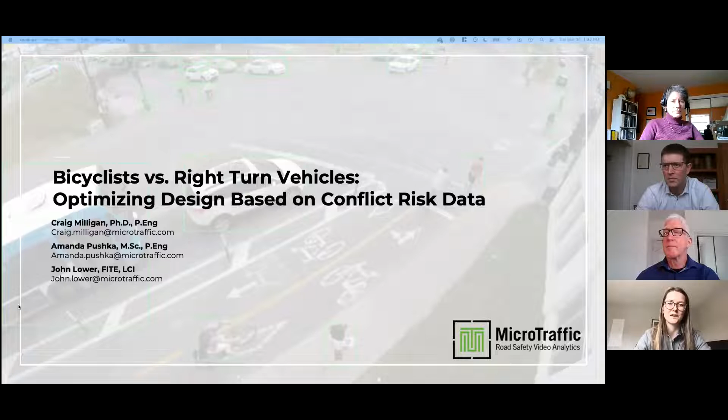So I'm Amanda Pushka. I'm a road safety engineer at MicroTraffic, and I'm joined by my colleagues, Craig Milligan and John Lower, who have road safety backgrounds as well. And Craig's the CEO and co-founder of MicroTraffic. Today, we also have some speakers. I guess if I share the outline for the presentation today, Kristen Nordback from UNC and Dylan Passmore from the City of Vancouver will both be joining us and speaking a bit about their thoughts and background when it comes to this problem. We're also going to talk about some study benefits, research design, and study mechanics, and then Q&A.

So we're just curious about the demographic of who's joining us today. It's great to see some input come in there, and please keep this menti.com tab open because we have a few other questions as we carry forward here. So great, yeah. I'll just give it another minute here. It looks like we have a decent spread, but a good number of cities and a couple states. So great.

So the next question we have is just related. We're talking here today about bicycle safety, but we're curious about some of the biggest safety challenges that you're facing, your agency, in terms of safety. And this should develop a word cloud so you can actually type in any answer you might want, and inputs and responses that receive multiple answers will get bigger on this slide here. So if you want to put any thoughts you might have for the biggest challenge that your agency might face when it comes to safety. So here we go. We're starting to see some inputs come in, automobile speeds being one.

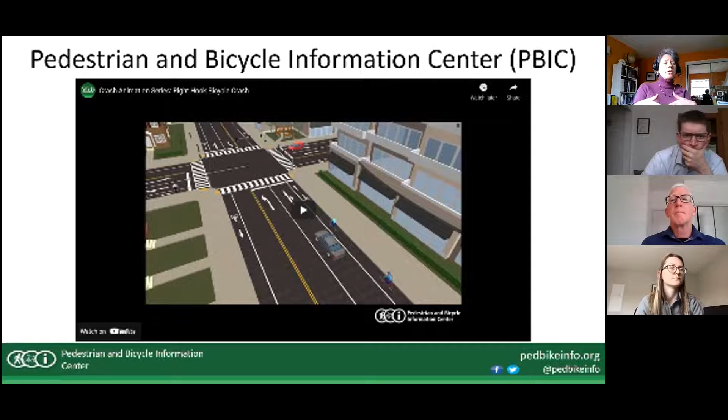And I have a video here from the Pedestrian and Bicycle Information Center, which we host at UNC. It's a place where you can find all sorts of information about bicycle and pedestrian issues of all sorts. And we've just created this series of videos about different crash types that are common for bicyclists and pedestrians.

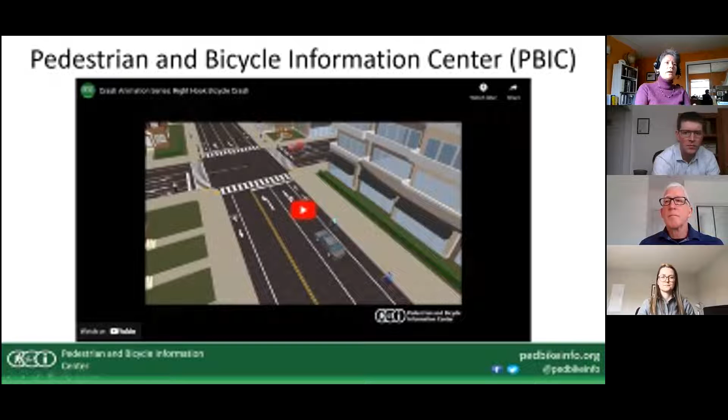So I'm just going to try to play a little clip of this. I know that you all know what right hook crashes are, but if you have colleagues that aren't familiar with this crash type, you can point them here. It's a free resource, and they can see what this crash type is and get a perspective on it. So I'm just going to try to play a little clip here, if I can.

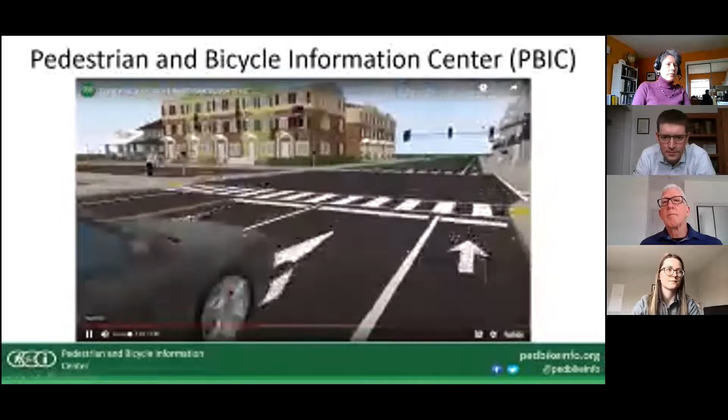So that's our crash type that we're concerned about. And they also have views of a right hook crash, different views from the driver and the bicyclist perspective, so people can really see what this type of crash would feel like. Okay. A driver view of a... So we're gonna now go on to the next slide, but that's available on our website if you want to share it.

So another resource we have is the pedestrian and bicycle crash analysis tool. And that's been used for the last 20 years to crash type different bicycle and pedestrian crashes with motor vehicles. So we know that this right hook crash, which is called the motorist right turn same direction crash in our typology, is the third most common for a college town that used this typing methodology. It's 14% of crashes at intersections.

This college town is about 100,000 people. So even in places that are very bicycle friendly, this is a very common crash type. The good thing is that it tends to be lower severity than some of our crashes. So that's good. But it's still something we're really concerned about because it's so common, and 1 in 9 of these crashes can be fatal and severe in that particular city.

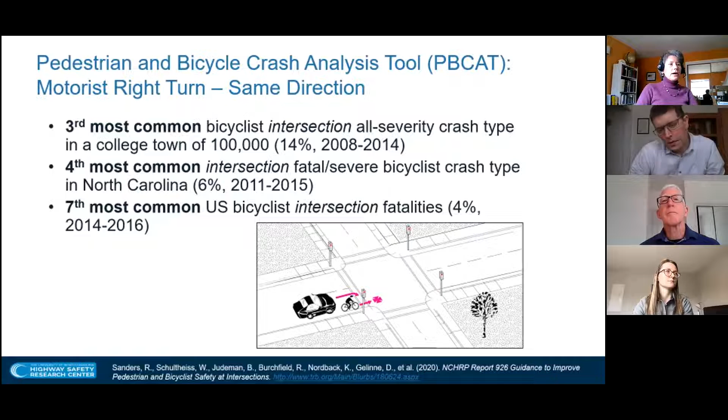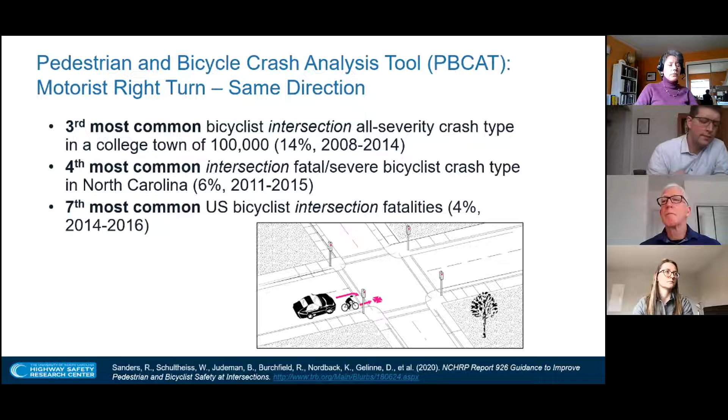The state of North Carolina also used this crash typing, so we can say that it's the 4th most common intersection fatal and severe crash type in North Carolina. So that's pretty big, 6% of the fatal and severe intersection crashes in the state. And when you look at fatalities using the FARS data set across the United States, it's the 7th most common fatal bicyclist intersection crash. So intersection crashes are a little less common than road segment crashes, but still 4% of these crashes, it is a very important crash type for us to study and understand.

So there have been some studies looking at what will remediate this problem. I worked on NCHRP 926 on guidance to improve pedestrian and bicyclist safety at intersections, free, available to the public. And we came up with 14 highly effective remediation techniques for separating the motorists and bicyclists, or for reducing speed at these types of crashes. So I'm not going to read this whole list, but you can see.

And these are not really based on research as much as just common sense and experience and practitioner practice. So we really need to do more research to understand what is the best and most effective. And we have many research methods. Ideally, we would be able to use crash data to understand what is causing and what is the right treatment. But fortunately, we don't have a lot of bicycle crashes, so that's good. But it also means we can't really use that data type to study the before and after and the treated, untreated scenarios for coming up with our crash modification factors for each of these potential treatments.

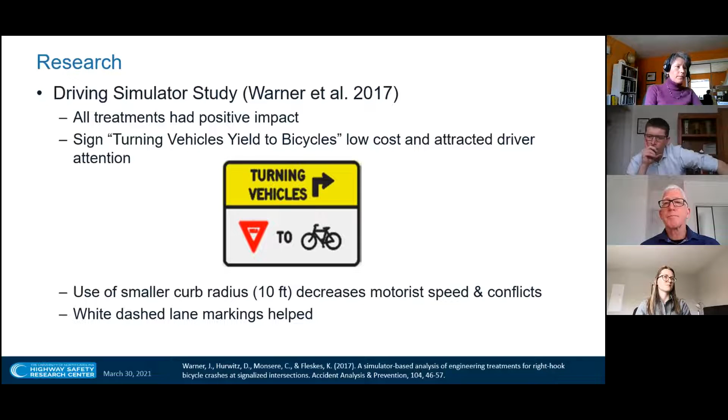So driver simulator studies, there's some of that, and that's been used to look at the eye motion of people driving, and we've found some things. Turning vehicles yield to bikes, reducing the curb radii. This is the work of the folks in Oregon. So there are some, I wouldn't say proven, but at least these are directions that we might go for solving this problem.

Leading bicycle intervals, exclusive phasing when you have high bicycle volumes, and mixing zone treatments can separate. Here's the bicyclist, and the bicyclist would then cross the right turning traffic prior to the intersection. So this mixing zone is a way to deal with these types of crashes, but they cause some confusion.

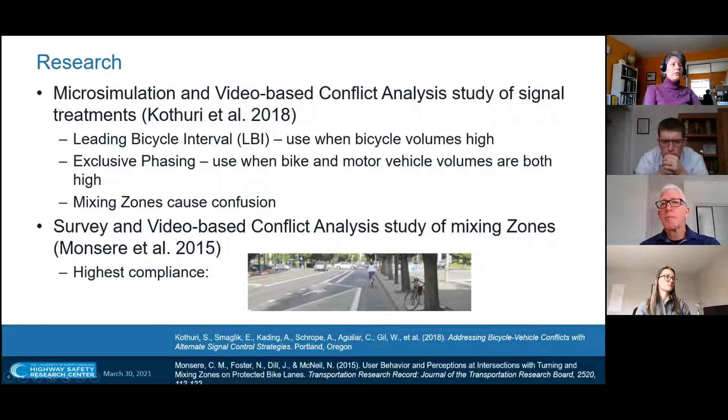This particular one in this study from Portland State University shows that this is a little better in terms of the pavement markings. So there have been some studies, and this one does use the video-based conflict analysis with the huge number of student hours needed to do that study.

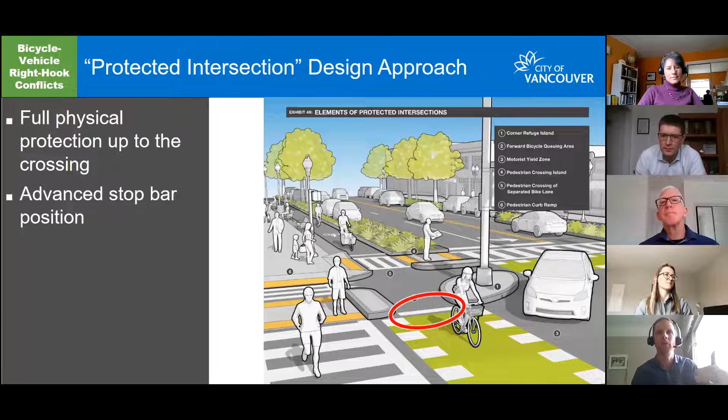We really tried to bring in a lot of the thinking around protecting people biking all the way up to initiating the crossing. So there's having that full protection all the way to where you initiate your crossing, but also that places the cyclist in this advanced stop bar position. It also has the benefit of reducing the pedestrian crossings, which is a bit of a nuance that we're probably not going to get into today.

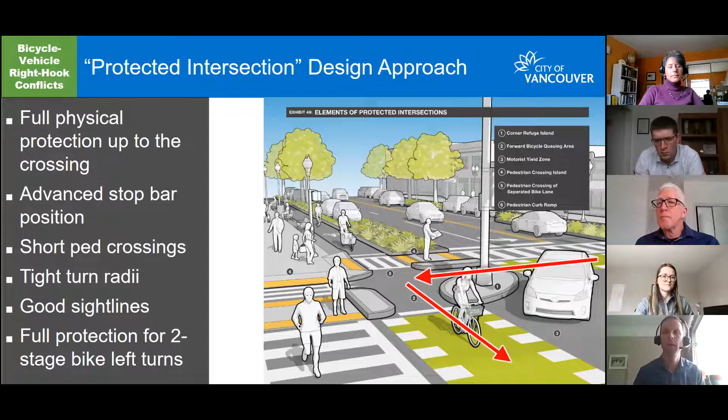But then, related to that right turn, it gives you an opportunity to really tighten up that turn radius in the corner there. There are opportunities to improve sight lines between the motorists and approaching cyclists. And it gives the cyclist making the left turn full protection as they wait to proceed to the second stage of their turn. So there's a lot of benefits to that, and we've been getting really good feedback.

I'd say though, a lot of the questions that we're really struggling with as designers come when you get into some of the nuance, and you don't necessarily have all the space that we see in some of these beautiful artist renderings and conceptual drawings.

So one of the questions we're really wrestling with, especially when we're talking about permissive turns, which this diagram implies, is what turn volumes are acceptable when we have permissive turns allowed? At what point do we really need to push hard to have full phase protection between through cyclists and turning motorists, and accept the delays that come along with that? And then there are these questions around the lateral offset between the turn bay and the approaching cross bike.

The CROW manual, for example, talks about 5 meters, and that's typically what we target, but we can't always achieve that. So, what is that appropriate lateral offset? And sometimes, which I'll talk about in a minute, we're choosing to install a right turn bay instead. And when would we prefer a right turn bay versus that lateral offset?

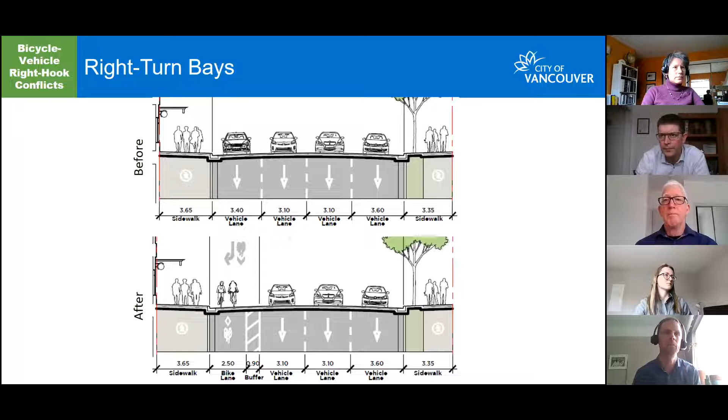So I just want to give you a flavor for some of the design questions that we're struggling with, and then maybe just show you a couple of quick examples. So this is one where we have a one-way couplet downtown that we kind of road dieted, and we converted from a 4-lane to 3-lane cross-section with a protected bike lane. And in our initial implementation, we did a not so great, I'll say, mixing zone. It was a really short right turn bay.

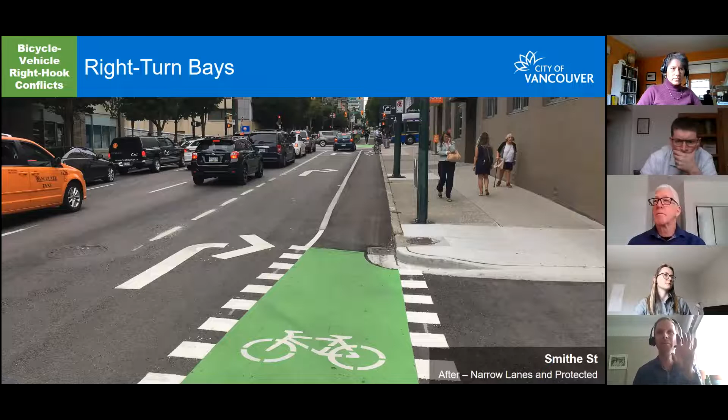So we actually came back a couple of years later and redid that approach with an actual proper right turn bay. You can't tell from the photo, but the bike lane is actually raised up about 4 inches here, so there's full protection all the way up. And I know this has been a really hot topic in the US, because I believe the MUTCD doesn't allow for this currently. So that's a whole other conversation, but this is an uphill direction.

We actually installed a similar configuration on the other pairing of this one-way couplet for the downhill. And that's where I think it's been a really noticeable benefit to have that right turn bay. You have a bit of pressure taken off the right turning motorists, but also a lot more clarity to the approaching cyclist of the intentions of that driver.

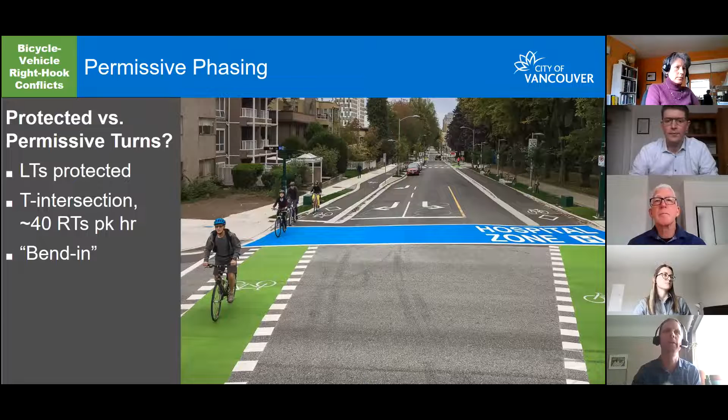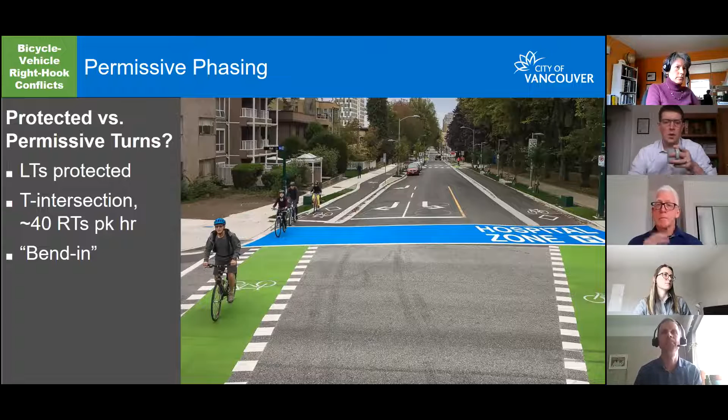This is a recent 10th Avenue project where we have relatively low right turn volumes, around 40 in the peak hour. And so we've been allowing that to run permissive. We actually have the left turn protected, for reasons I won't get into right now. But it was, again, just like, are we comfortable running that permissive right here in light of the volumes and space constraints that we're dealing with?

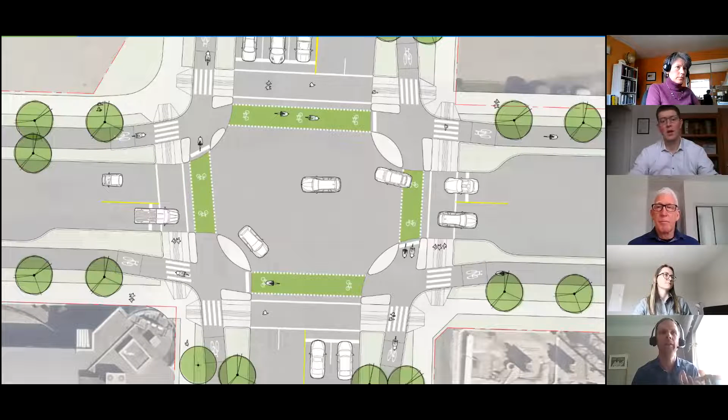And then we also have this location, Quebec and First. I think we've presented on this a few times in the past at other conferences, but basically it was our opportunity to implement, through some development that was happening in the area, that prototypical protected intersection. So this is what it actually looks like in the field. And I'll just point out, you can actually see it here. It's quite a queue.

Those right turn volumes are actually fairly high. They vary between 200 and 300 during peak hour. And we had this big debate around how to accommodate that. And so in this example, we actually introduced a right turn bay. In so doing, we didn't achieve that full 5-meter lateral offset. That's sort of the ideal.

And so it's running permissive. Turn volumes are fairly high. And so there's just sort of a lot of question marks around, like, is this okay? We introduced that right turn bay, though, to future-proof for the possibility of providing that protected phase. So that option is there, luckily.

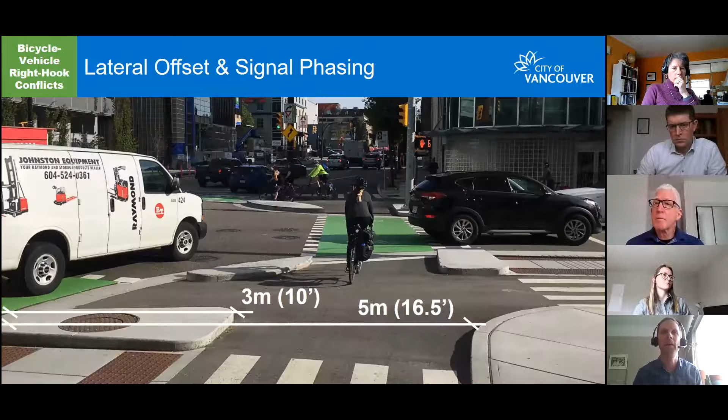But yeah, you can kind of see, this is the approaching cyclist perspective. That lateral offset's 3 meters. You can tell in this shot here, it's really not until the vehicle is at that 5-meter mark that there's really an opportunity, especially in a vehicle of this type, for that motorist to actually be able to see down the approaching bike lane. So there's a lot of geometric questions that we have.

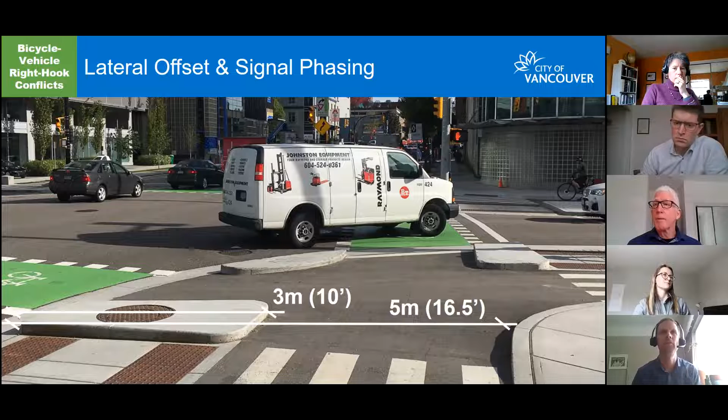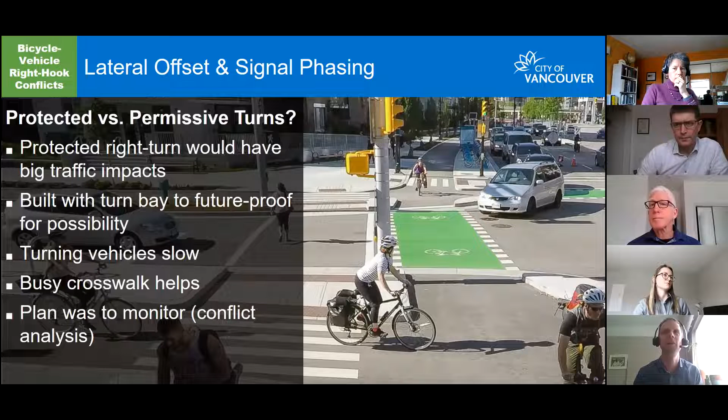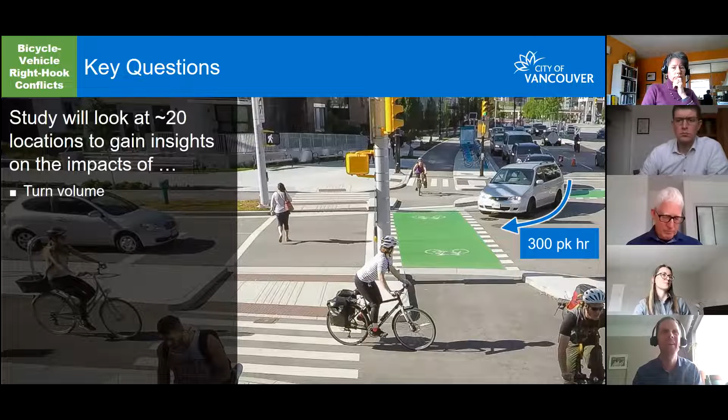And we've been building out quite a few of these types of intersections. So I think this study has been a really interesting opportunity to do a deeper dive into the conditions that we have around the city. Some of the things that I've flagged already that we've been hoping to look at through this study is the impacts of turn volumes. There's also conditions where we are allowing permissive rights across a bidirectional cross bike. So what are the impacts of unidirectional versus bidirectional in terms of safety?

Then there's these issues I've been mentioning of trade-offs between having a right turn bay versus no right turn bay versus that lateral offset. There's another example where there is no right turn bay, and this is where we have the lateral offset. And then phasing, of course. Sometimes we feel pretty strongly that we need protected phasing, but then you can get into some nuance like protected permissive. When could that maybe be appropriate versus permissive?

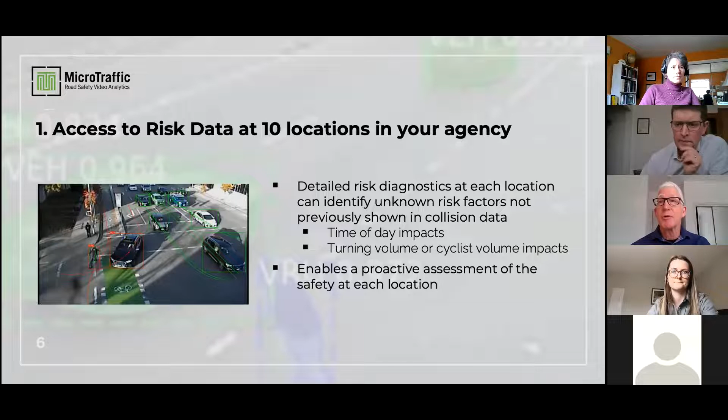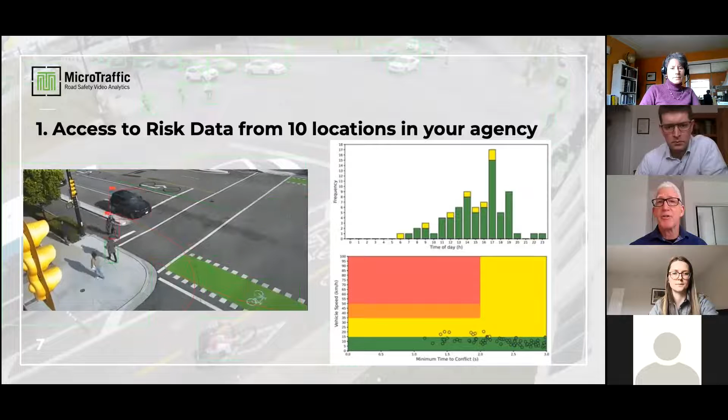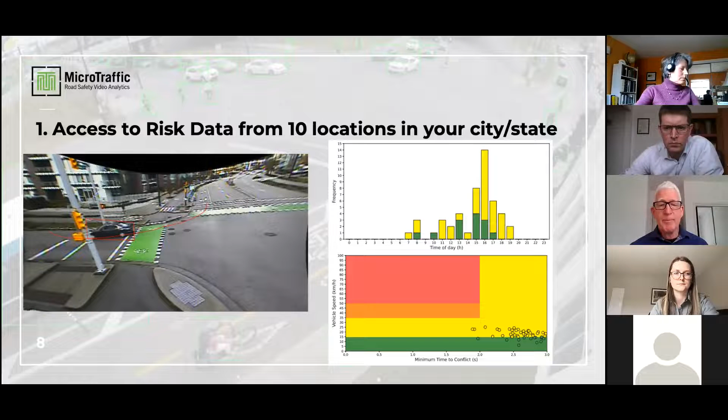Next slide, we'll talk about the benefits to the broader transportation profession. You're going to be a part of identifying preferred design treatments. And you also will be decreasing agency liability for bike crashes. What we're doing by you contributing your 10 locations to an approximate 200 site study is to build a professional toolbox. And that's going to be available to the transportation profession to counter opinions with facts.

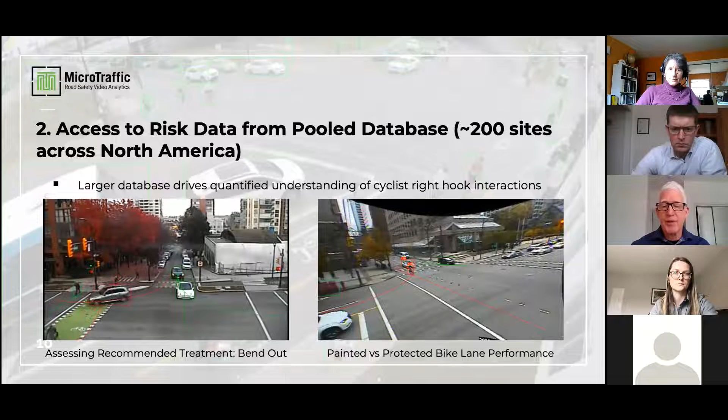In the next slide, we've got a couple videos, and those will contribute to a larger database with understanding of vehicle-cyclist interactions. We'll be able to quantify the impacts of various treatments depending on the cyclists and the right turn volumes, which will be collected as part of this study.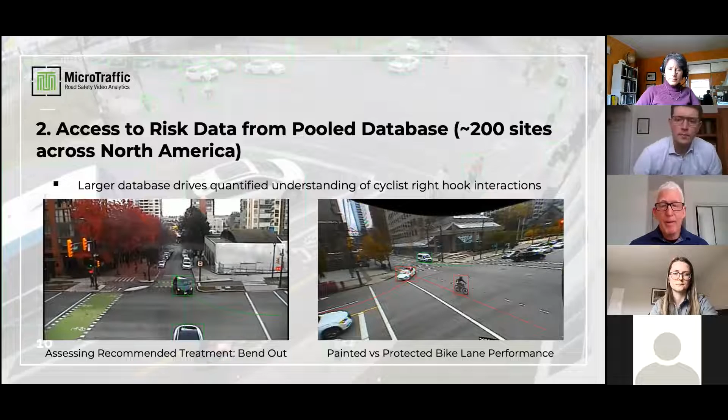And in the next slide, I think is a great example where if you look at two similar intersections, they both have right turn bays or right turn pockets. And on the left, it is a protected vehicular right turn arrow versus on the right, it is protected permissive. And the data is telling quite the story here. That is that the protected right turn signalization had twice as many hours of analysis, yet the protected plus permissive operation resulted in 5 times or more the number of near misses. So that is operational intelligence that goes from study to being practice ready in implementation of safety measures.

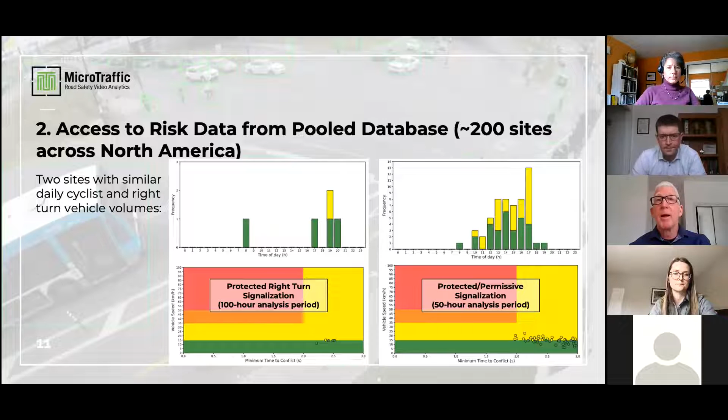In the next slide, the third benefit is to your individual career. You're going to be involved in a study that not only will help shape the profession, but answer what has been a hot topic over the last couple of years. We've seen a large amount of research on the issue in question, and that's going to continue. You can help by contributing your 10 intersections to this larger study so that we get quantitative design guidance for practitioners to improve cycling safety.

I want to conclude by noting that tomorrow is, I'm calling it Infrastructure Day, because the Biden administration will be in Pittsburgh and will start rolling out their ideas for the infrastructure bill. I think what we can expect to hear is that the Build Back Better effort was going to definitely include modal equity. So that's good news for us bicyclists.

And also hear that the road to Vision Zero is going to have bicycles on it, in addition to connected and autonomous vehicles. So as study after study progresses, we're going to see the interaction of bicyclists with connected and autonomous vehicles. And you can be part of that, making that interaction safe. So I strongly encourage you to participate in this effort. And I'm done.

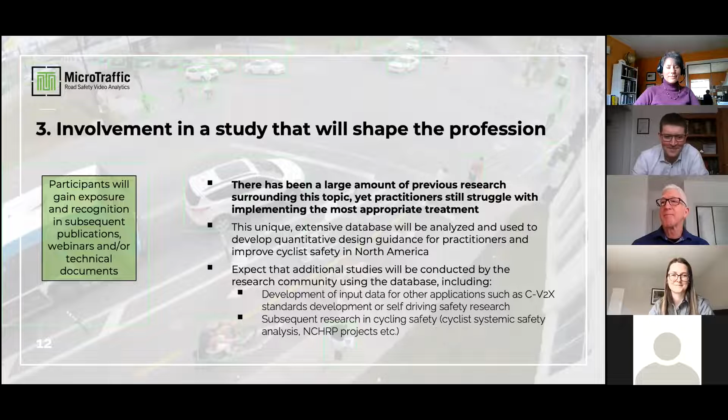Craig, do you want to jump in here on some of the research design? I will. Yeah, thanks, Amanda. I couldn't remember if there was another Menti question. Those things are so fun.

They're so much fun. Yeah, my name's Craig. I'm a road safety engineer with MicroTraffic, and I want to tell you a little bit what we hope to answer with this

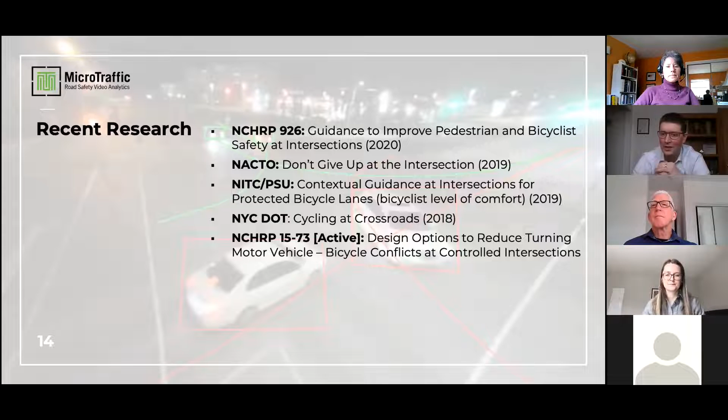database. So if you go into the next slide, Krista mentioned some of these recent efforts, but she also talked about how either they're using limited crash data or unrealistic time expectations on students to review video, and they end up putting in the design guidance things that reflect collective wisdom, and there's a real desire to say, you know what, we need to validate some of that stuff and even take some of that collective wisdom a step further in kind of fine-tuning the answers to some of the questions that, say, Dylan brought up.

I mean, Dylan was on the committee or a co-author of NACTO and came up with the intersection, and he's coming out of that effort with questions. And so when we heard about that, we said we want to help build the database, but we need your help to do that. So our goal here is to provide this community database that can just take all of these research efforts to the next step. And NACTO can have it, every NCHRP panel can have it, every university can have it, and so on.

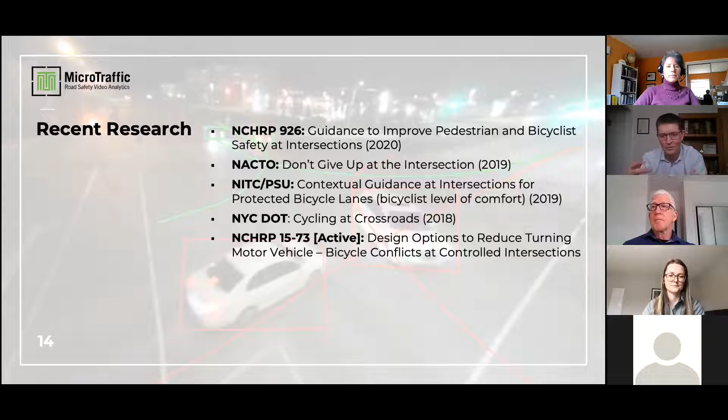If you go to the next slide, Amanda, when City of Vancouver came and said we want to investigate this problem, Dylan helped put together this matrix and said, there's all these questions about how these different facility types are performing. And one of the key things we want to do is fine tune this matrix with a larger group. You know, there's 45 cities, there were 49 earlier on this call, and put a bit more collective wisdom into this matrix, finalize it, populate it with everybody's participation so we have a decent sample size and can really build this cross-sectional database across a lot of different facility types. So it's a cross-sectional design.

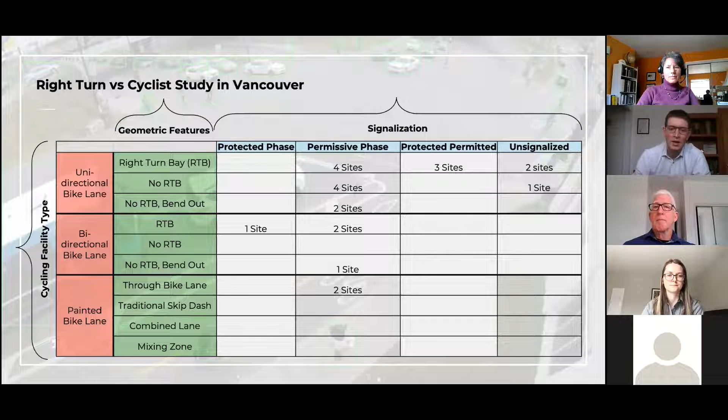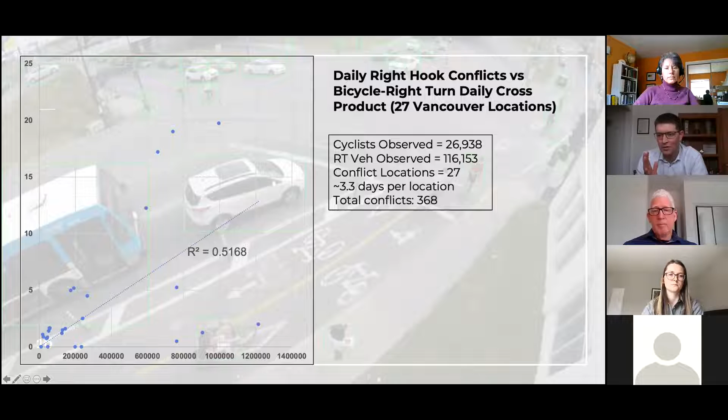So I want to talk a little bit about the global graph that came out of this. On the vertical axis here is the number of conflicts per day, so whatever we saw in the 3.3 days or 4 days, normalized to the number of days. And the bottom axis is the cross product of bicycle traffic and the right turning volume. And if you go to the next slide, Amanda.

The first thing we noticed is that there's pretty striking correlation between cross product and conflict frequency at a 52% R squared. That's with one explanatory variable, it's explaining a lot. This value often is talked about as a percentage explanatory power on the outcome. So about half of the variability in conflict is explained by the cross product. So that speaks to Dylan's question, at what cross product do you put in protected phasing?

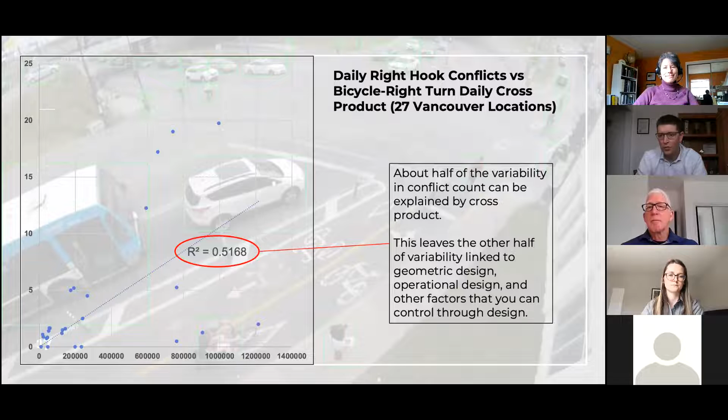But the other interesting thing to us is the other half, the unexplained variability, the 48%. Why are some conflict counts way above the line of the average conflicts per day given the cross product, and why are some below? There's additional variability here that's not explained by the cross product. And this other half, we think the factors that explain this variability can be discovered through research and then controlled for through design, okay? And to illustrate what I mean by that, if you go to the next slide, I just made up these ovals, okay?

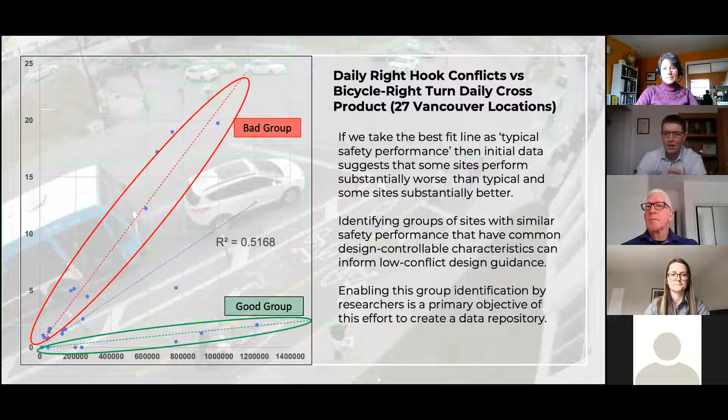And what we're hoping to unlock from this is two opportunities. We can learn to more accurately design future cycle lanes so that they perform more like the green group than the red group. And we can learn ways to retrofit the red group facilities that we already built to shift their future safety performance into alignment with the green group. Can you go to the next slide, Amanda?

But if you have a strategy like prohibiting right turns or using protected right turn phasing, both are kind of costly strategies in terms of spending your political capital and operational capital, and because of the delay to vehicular traffic, right? So we hope that data coming out of this study could maybe support evidence-based warrants, could emerge from that.

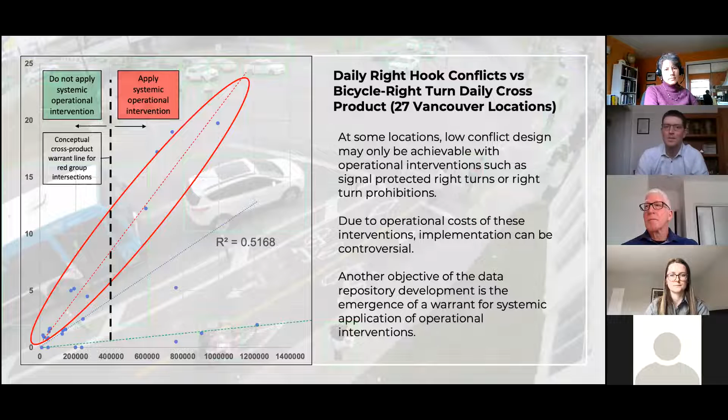NACTO could come around that, NCHRP groups could come around that, or even city by city could say, here, based on the data, even if it has to stay in the red group because we can't retrofit it, we can control it to below 5 conflicts per day if we use protected right turn phasing or something like that. So just kind of separating out where the cross product or other operational factors lead to spikes in conflict counts.

There's a lot of other research questions we hope that the community can pick up and answer with this kind of repository that we're going to build together. How can connected and automated vehicles form context-sensitive conflict and crash avoidance strategies? More detail on distinguishing serious and non-serious conflicts, the relationship between conflicts and injury counts. We're going to take the injury count, crash counts at every location, and have a 200 site conflict versus injury collision prediction model.

We recently did a conflict to injury collision prediction model that got a 94% R-squared for left turn versus opposing crashes, for vehicular crashes, and published in January in TRR. And we'd like to get the same kind of thing. So not every conflict is equal.

In that one, we subdivided the conflicts into serious and less serious based on kinematic factors like speed, and also temporal factors. And we found the more serious ones had a 3 times more powerful prediction on the future injury count. So that's kind of a bit of what we hope to accomplish through the research. I'll pass it back over to you, Amanda.

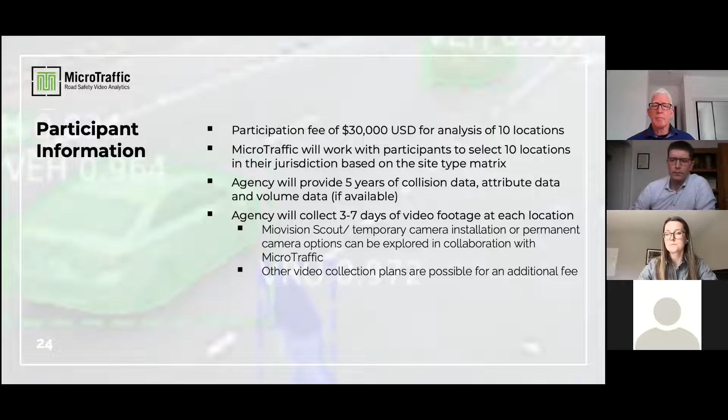Third, the database can be leveraged to develop a practitioner design guidance resource and for subsequent studies that Craig touched on. And finally, we expect publications and public webinars at the study completion to help to shape the profession with this database.

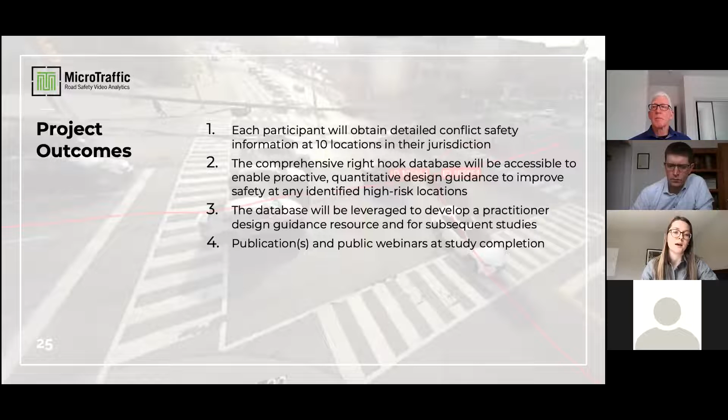But if you're intending to participate, that's great. We'd like to, best case, launch this project right away. So please let us know. And if you are not able to participate, please also let us know. So this expression of interest or intent deadline, we're hoping by April 15th. And we understand that contract finalization may extend beyond this, but we will be sending out that survey. So please keep an eye out for that.

By May 1st, we hope to form the technical steering committee and finalize the site type matrix. That will enable video collection to occur during the summer months when cyclist volumes have increased. So between May and August is what we expect. And then following the video collection will be the video analytics. And of course, this is impacted by the video collection schedule, but it'll be complete by December 2021, but we do expect to be prior to that. And then also the research analysis will be ongoing throughout the process, but expected in early 2022.